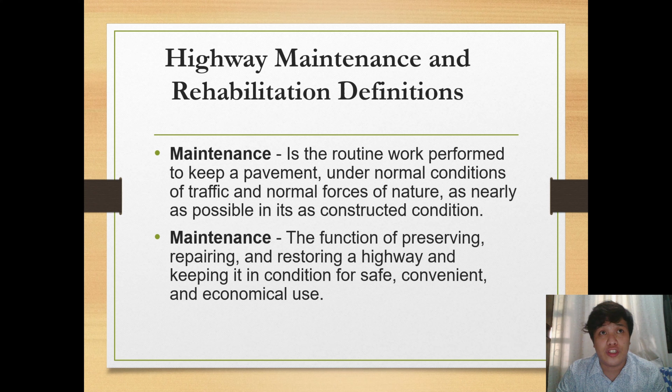Highway maintenance and rehabilitation definitions: maintenance is the routine work performed to keep a pavement, under normal conditions of traffic and normal forces of nature, as nearly as possible in its as-constructed condition. Maintenance is also the function of preserving, repairing, and restoring a highway, keeping it in a condition for safe, convenient, and economical use. So maintenance is routine work to keep a pavement in good condition, basically for the use of the people.

It includes both physical maintenance activities such as sealing, patching, filling joints, and so forth, and also traffic service activities, which include painting, pavement markings, and litter removal. Since we live in a tropical country, we do not apply removing of snow and ice since we only have two seasons.

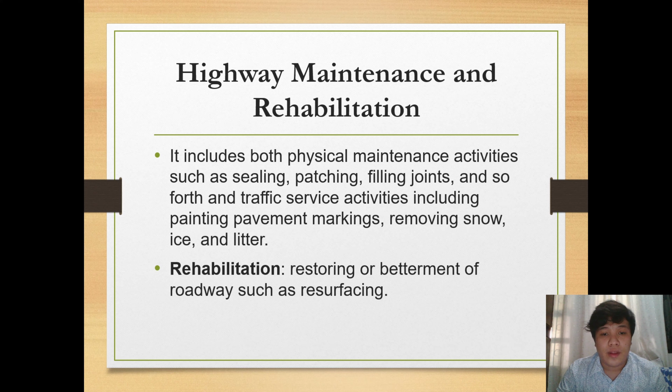Next is rehabilitation. Rehabilitation is restoring or betterment of roadways such as resurfacing. So rehabilitation talks about the renewal of pavements, and rehabilitation programs are designed to offset the effects of weather, vandalism, vegetation growth, and traffic wear and damage, as well as deterioration due to the effects of aging, material failures, and design and construction faults.

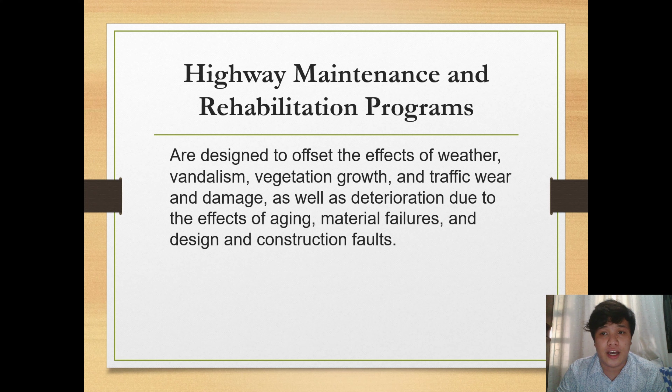An explanation of this is that the program is also designed to offset the effects of all the stresses that cause our pavement to deteriorate.

Why are maintenance and rehabilitation necessary? All pavements require maintenance, but stresses producing minor effects are constantly working in all pavements. This includes changes in temperature and moisture, traffic, and small movements in underlying or adjacent earth. Distresses are visible evidence of pavement wear, the end result of the wear process which begins when construction ends.

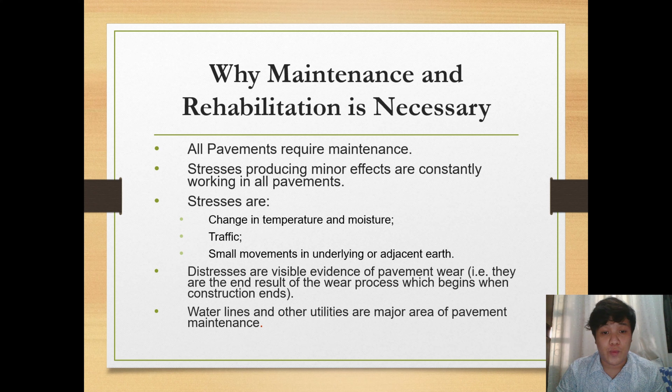Water lines and other utilities are a major area of pavement maintenance.

How important is highway rehabilitation, and of course its challenges? Its importance is that it protects investments made in highways, economic and safety of the public road system. It is also one of the main reasons why we have the economic status we have today.

It connects cities from country to country and so on, and the challenges include increased roads, additional mileage of travel, road function and classification, vehicle sizes, and traffic. The traveling public expects a higher level of maintenance, and there is the size of the maintenance budget.

These are challenges because when we have rehabilitation on highways, we need an alternate road. For example, this is an example of increased roads, and a particular challenge is the size of the maintenance budget. We need to compute the exact budget for it.

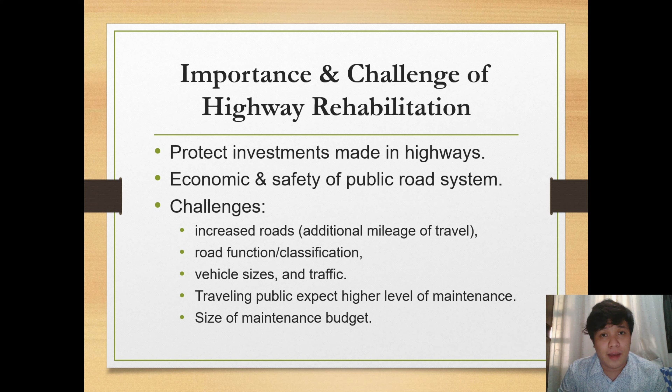Some effects on highway rehabilitation: urban highway rehabilitation projects create problems not only for state highway agencies and motorists but also for commercial premises. For businesses dependent on highway traffic, these projects can potentially disrupt the flow of customers that provide essential business revenue.

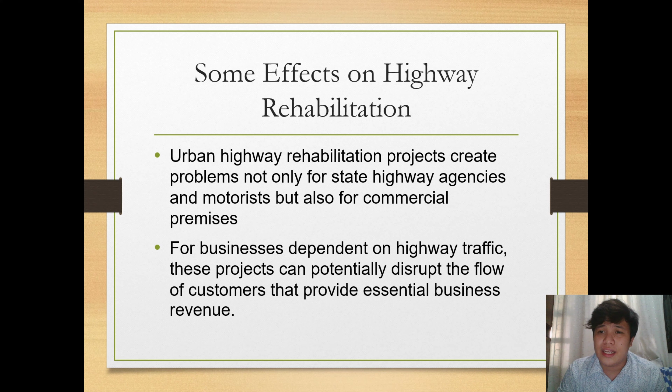One of the effects is especially on the business industry. Highways are really needed and very important, for they connect businesses to people and allow the provision of essential needs of customers, like food and school supplies. We need proper highways, so highway rehabilitation really gives a negative side to businesses in that sense.

Next is maintenance management. Its purpose is to capture information about maintenance activities performed and resources expended. Maintenance management systems do not manage programs, reduce costs, or improve performance; rather, they provide maintenance engineers with the information and analytical tools needed to allow them to do so.

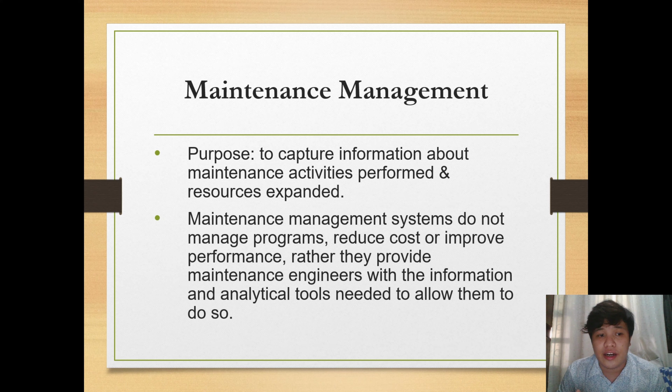The purpose of this maintenance management is to capture information for the duration of the maintenance or rehabilitation, and during this procedure we need engineers or professionals.

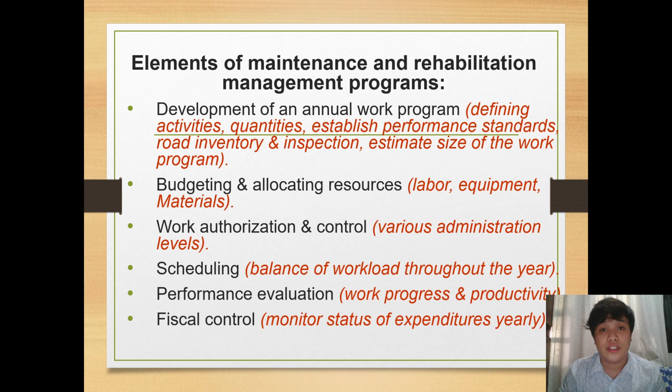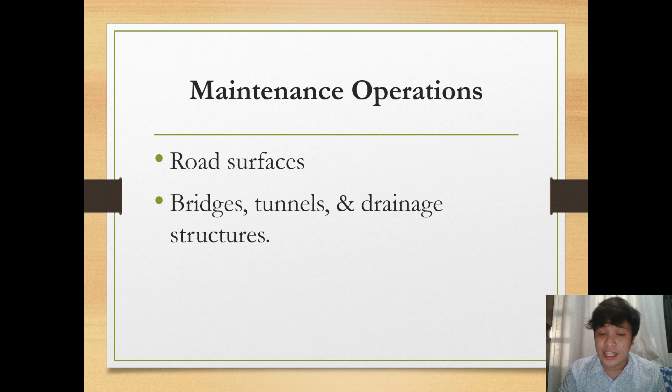For operations, we have road surfaces, bridges, tunnels, and drainage structures. For road surfaces, aggregate road surface failures are due to improper drainage, poorly mixed materials, and inadequate foundation.

Next is bituminous surfaces. Failures here are due to weathering, failure of base or subgrade due to material quality or compaction, or improper drainage. Next is plain cement concrete (PCC) surfaces, where failure is due to buckling.

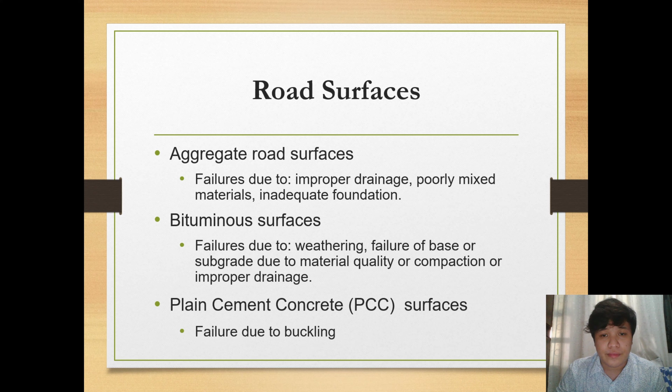For bridges, damage is caused by accidents, floods, or other unforeseen events, mainly floods and accidents. For steel bridges it is erosion, and for concrete bridge decks, deterioration is corrosion of reinforcement bars due to penetration of water, salts, or chemicals.

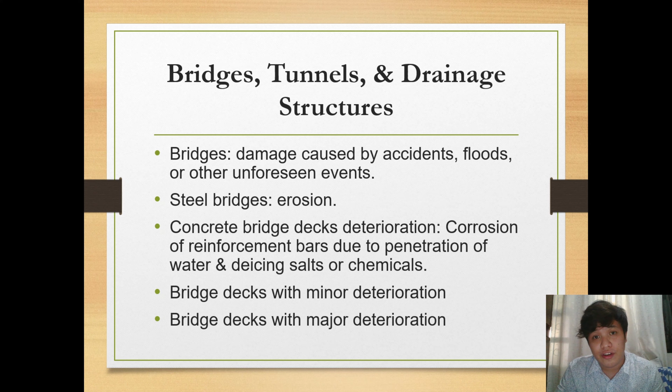This applies to bridge decks with both minor and major deterioration.

Pavement rehabilitation: measures to improve, strengthen, or salvage existing deficient pavements so they can continue service with only routine maintenance. Deficient pavements exhibit distress in excess of what can be handled through routine maintenance.

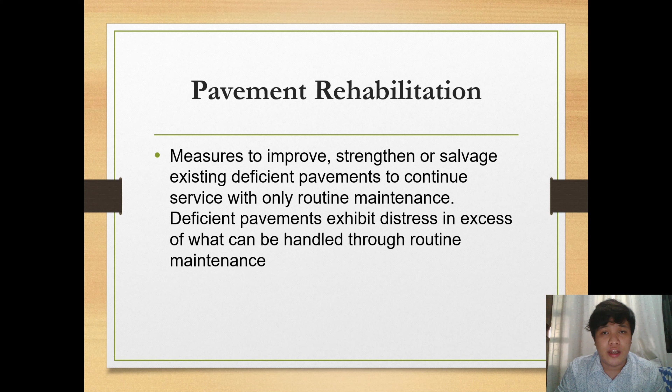We need to improve or renew the strength of the pavement so it can handle stresses due to traffic or movement of the earth. Proper maintenance also extends pavement life; however, even the best maintained pavements will deteriorate with time and will need rehabilitation.

Conventional rehabilitation methods include reconstructing with all new material, and patching and overlaying with a new wearing surface. Due to the high construction costs, new methods of rehabilitation have arisen, which are pavement milling and pavement recycling, which will be explained by our next reporter.